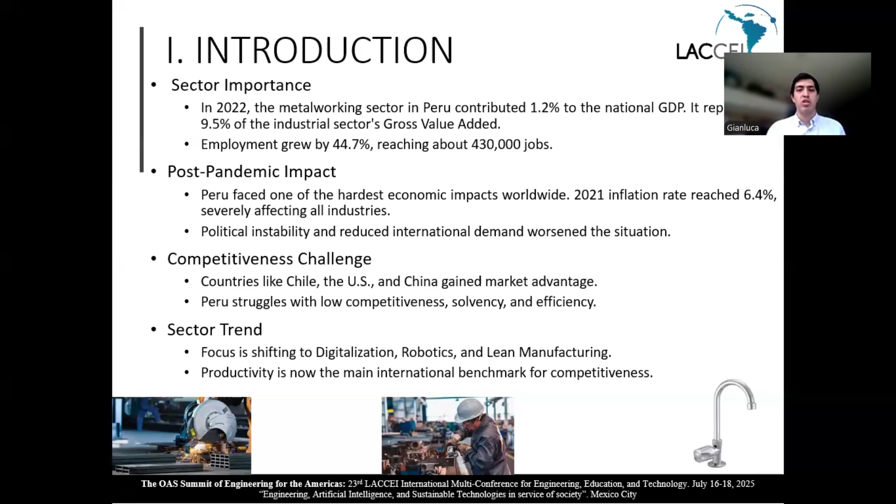This is where lean manufacturing becomes essential, offering strategies to increase efficiency and competitiveness. Previous studies have shown that lean manufacturing tools such as 5S, Poka-Yoke, and standardization can significantly improve performance.

For example, 5S implementations have increased productivity by 8%, Poka-Yoke reduced rework by 30%, standardization cut wait times by 81%, and improved on-time delivery by 30%. These tools not only improve operational performance, but also enhance quality and employee satisfaction.

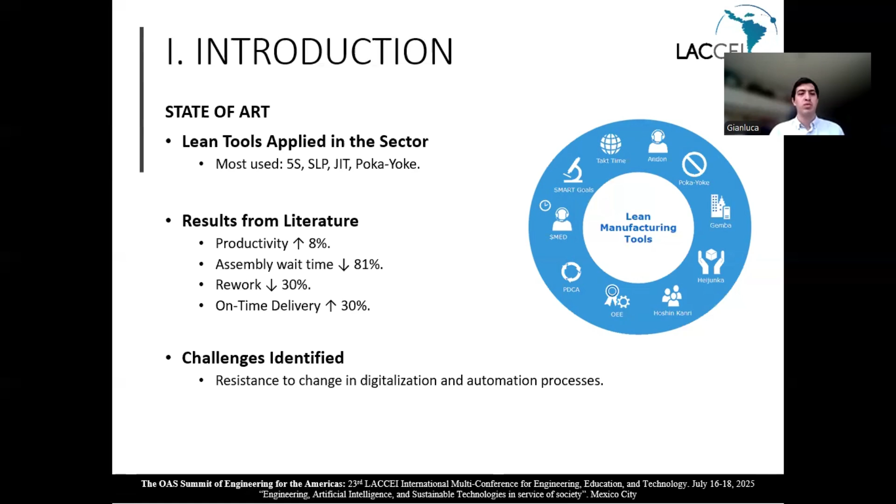Based on this background, we set out to apply lean tools in a Peruvian metalworking company to tackle the specific problems we identified. Through our diagnosis, we found the following problems in the polishing and chrome plating area.

First, productivity was low with 18 units produced per labor hour. Efficiency was also limited at 81%. We observed a high rate of human errors, 33 mistakes per quarter, and almost 30% of all parts required rework. In addition, idle times reached 280 minutes per quarter, and the absenteeism rate was more than 8%.

These indicators pointed to significant inefficiencies that were negatively affecting profitability, quality, and worker well-being. That led us to design a focused improvement proposal.

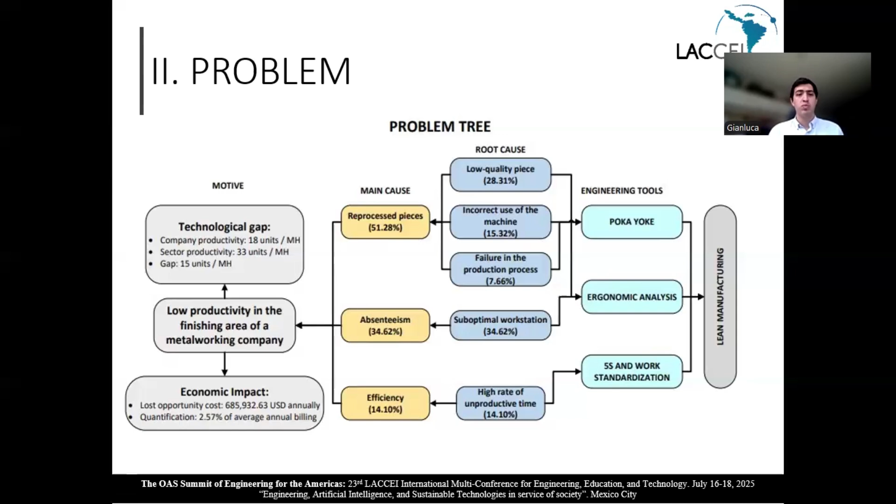Our improvement plan involved three key components. First, we applied the 5S methodology combined with work standardization in the polishing area. Second, we addressed ergonomic problems that were affecting absenteeism and rework. And third, we implemented a Poka-Yoke solution in the chrome plating stage to reduce human errors. Each of these components was designed to be low-cost, feasible, and sustainable for the company.

Now let's take a look at the problem we identified in the company under study. We compared several key indicators between the company and the overall sector average. The results revealed several performance gaps.

Productivity was significantly lower, at just 18 units per man-hour, compared to the sector's 33. That's a 45% decrease. Efficiency was also down by nearly 14%, at 81% versus the sector's 94%. The reprocessed parts percentage was slightly higher at 28%, which is almost 12% more than the average.

One of the most critical issues was the frequency of human errors in polishing, which reached 33 errors per trimester, 65% higher than the sector benchmark. Unproductive time totaled 280 minutes per trimester, representing a 40% increase. Finally, absenteeism stood at almost 9%, which is 74% higher than the sector average.

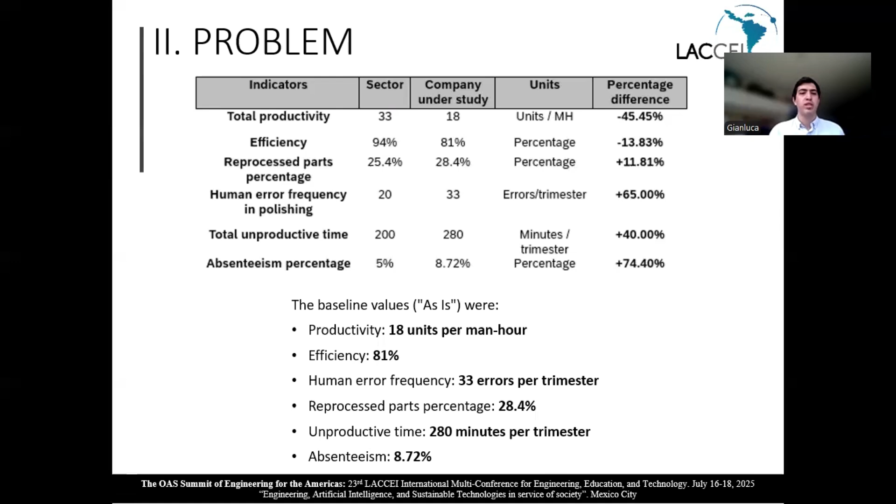These baseline metrics clearly highlight multiple areas where performance was below industry standards. They provided a starting point for improvement efforts and allowed us to quantify the magnitude of the problem.

To solve the main problems, we propose an improvement plan based on 5S, work standardization, ergonomic analysis, and Poka-Yoke. We first analyzed the company processes and collected data on key indicators like errors, productivity, and absenteeism.

This helped us identify the main inefficiencies. The proposal consists of three components.

Component 1: implementation of 5S and standardized procedures to organize workstations, improve time management, and ensure consistent performance. Component 2: ergonomic improvements such as better furniture, workstation redesign, and operator training to reduce strain and absenteeism. Component 3: error proofing through Poka-Yoke systems, process standardization, and safety measures to reduce human error and improve quality.

Together, these actions aim to boost productivity, reduce waste and rework, and create a safer, more efficient work environment.

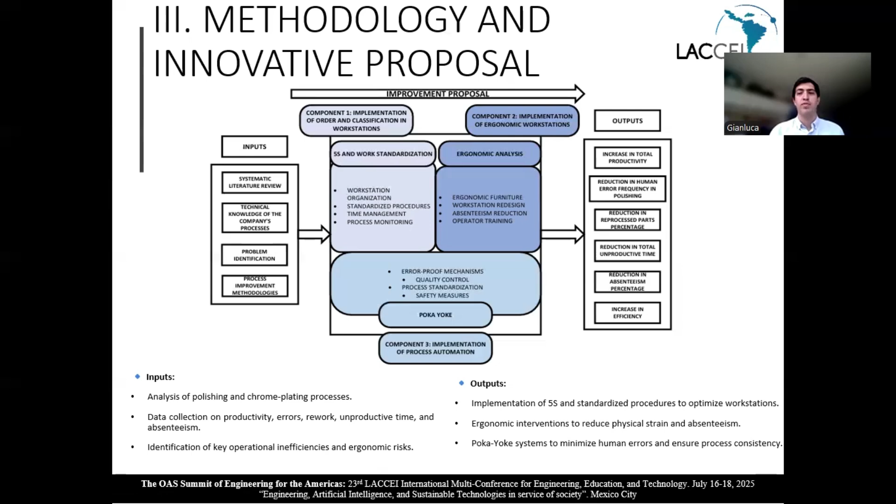Let's start with 5S and work standardization. Our goal was to improve workplace organization and ensure consistent execution of tasks. We implemented the 5S: sorting, setting in order, shining, standardizing, and sustaining.

We introduced mobile carts to keep tools organized and close to the work area, reducing unnecessary movement. We also standardized the tasks performed by operators and defined protocols to reduce variation.

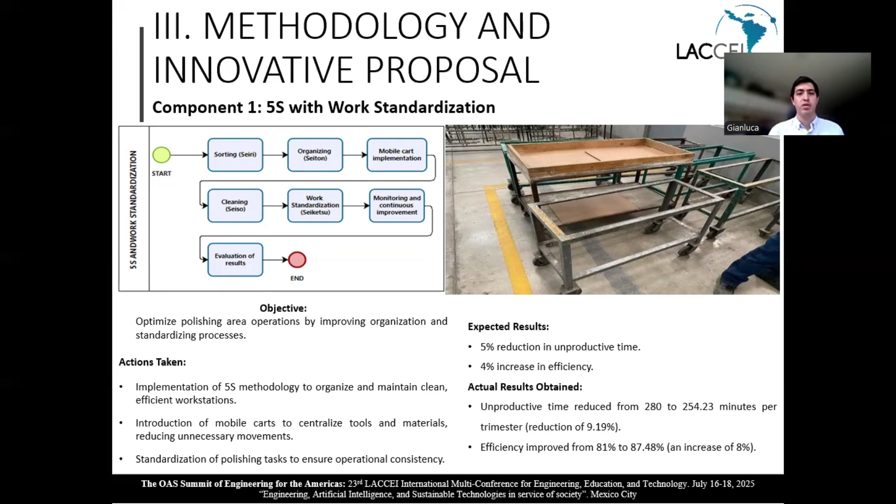As a result, idle time dropped by about 10%, from 280 to practically 254 minutes per quarter. Efficiency improved from 81% to nearly 88%, exceeding our initial expectations.

The second component addresses ergonomics. We conducted surveys and anthropometric analysis to understand operator discomfort.

We then acquired adjustable chairs adapted to the height and posture of each worker. Additionally, we implemented standardized workstation configurations and maintenance plans to ensure consistent ergonomic conditions.

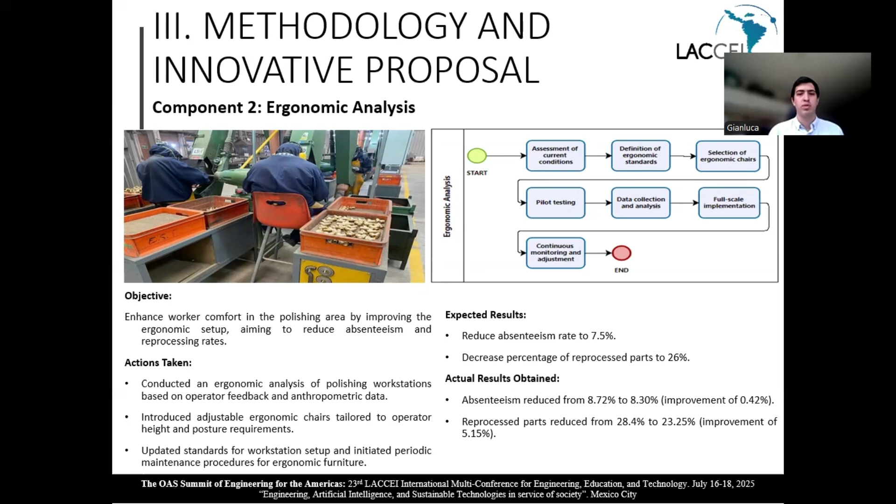The goal was to reduce absenteeism to 7.5% and rework to 26%. As a result, absenteeism decreased from 8.72% to 8.3%, and rework dropped almost to 23%, even better than expected.

This shows us that simple ergonomic interventions can have a strong impact on productivity and quality.

Finally, to reduce human error in the chrome plating processes, we implemented a Poka-Yoke system. We installed a semi-automated monorail that physically guides the material through the process. This solution helps prevent mistakes caused by human distraction or fatigue.

Operators were also trained to follow standard parameters to ensure consistency. With this intervention, human errors were reduced from 33 to 25 per quarter, a 24% improvement.

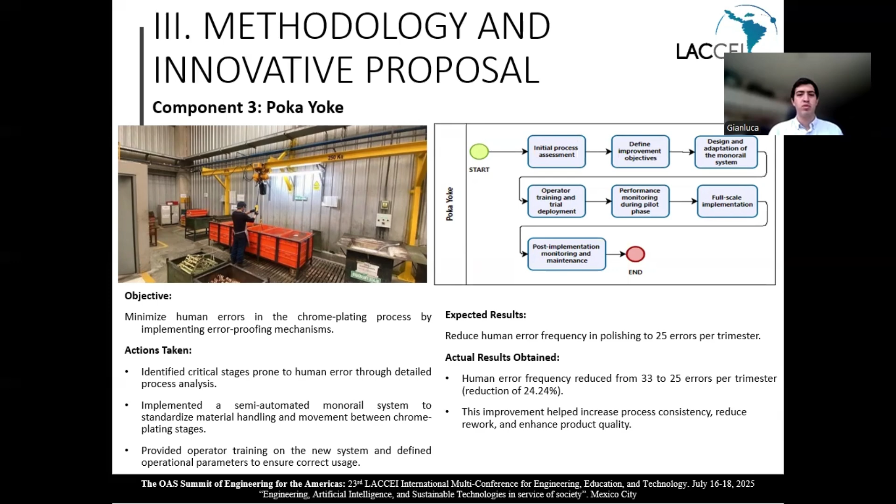To validate the feasibility of our improvements, we developed a simulation model in Arena software. This model replicated the company's current process and compared it with the improvement scenario. The simulation confirmed that the proposed changes were operationally viable and generated measurable improvements in key indicators like productivity, efficiency, and idle time.

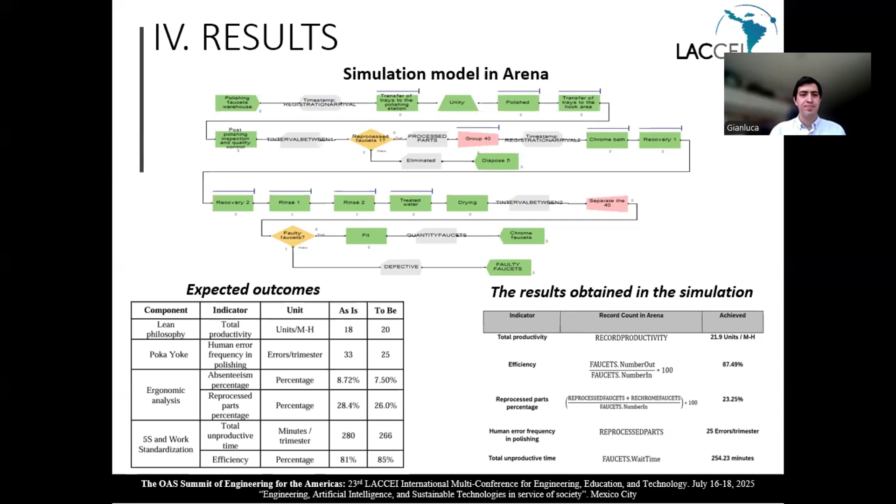From a financial perspective, the results were highly promising. The project had a net present value of practically $1.8 million, an internal rate of return of almost 67%, and a payback period of 1.41 years.

The benefit cost ratio was 1.43, meaning the company earns $1.43 for every dollar invested. These results demonstrate that lean tools not only improve operations, but also deliver strong economic returns.

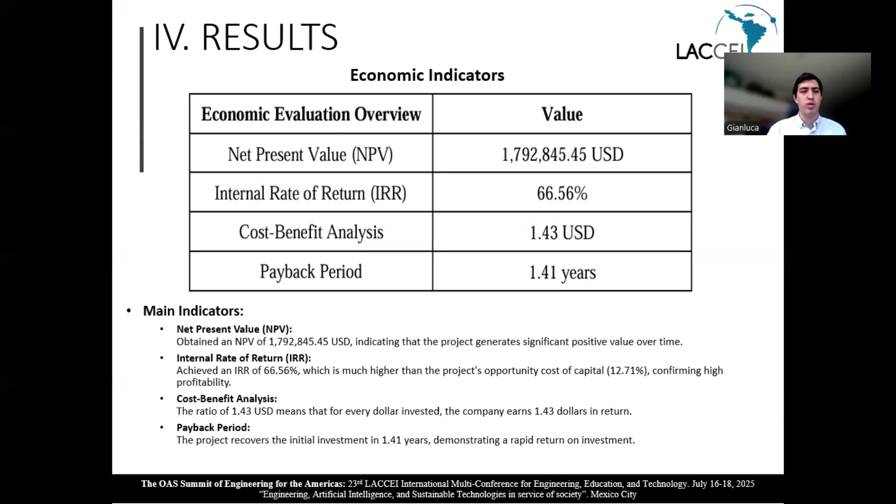We also performed a sensitivity analysis to assess project robustness. We found that a 15% decrease in the product selling price would make the project unfeasible, with a negative NPV.

However, if prices increase by 15%, the NPV rises to $6.67 million. Even with a 20% drop in sales, the project remains profitable.

Under the most optimistic conditions, the NPV could reach $13.56 million. This result shows that while the project is somewhat sensitive to price variations, it remains highly profitable under most realistic scenarios.

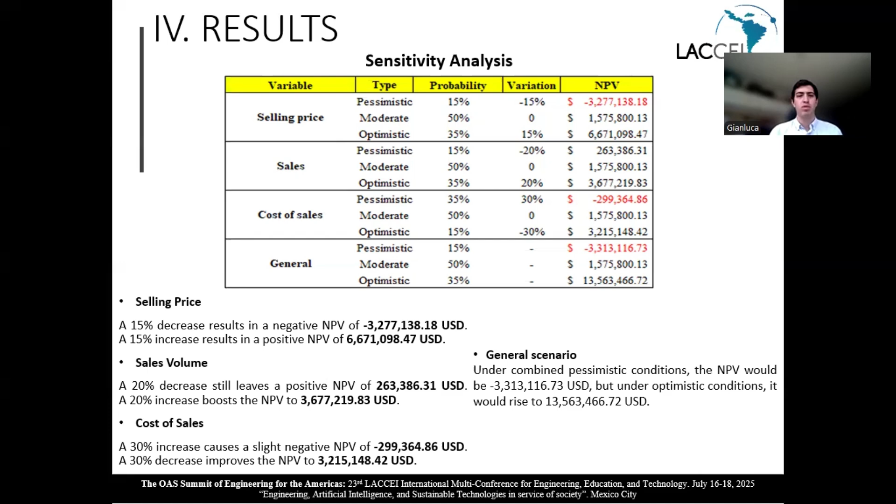To conclude, the integration of 5S, work standardization, ergonomic analysis, and Poka-Yoke led to a 21.67% increase in productivity, going from 18 to 21.9 units per labor hour.

We achieved improvement in efficiency, reduced rework and human error, cut down idle time, and lowered absenteeism. Simulation confirmed the feasibility of the redesign, and financial analysis shows strong returns with minimal risk.

This study demonstrates that lean manufacturing tools, when applied strategically, can generate significant impact even in traditional sectors like Peruvian metalworking. Thank you very much for your attention.